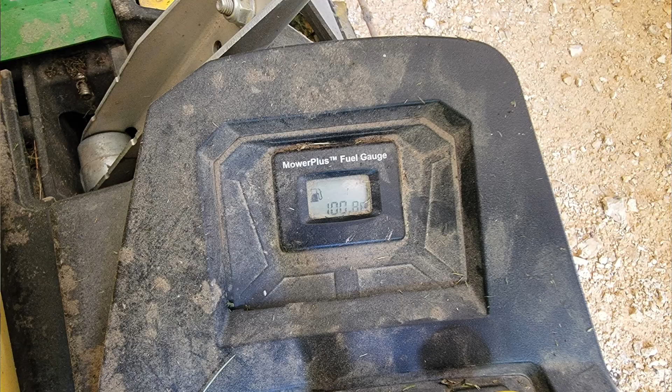Hey everyone, so we are doing a 100-hour inspection today. Basically changing oil, spark plugs, a bunch more stuff. There's a list I'll show you here in a second.

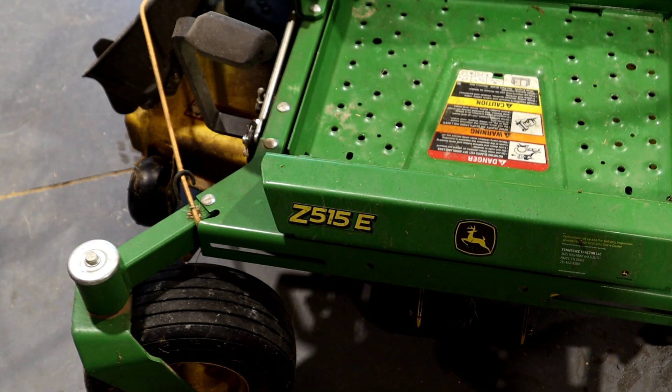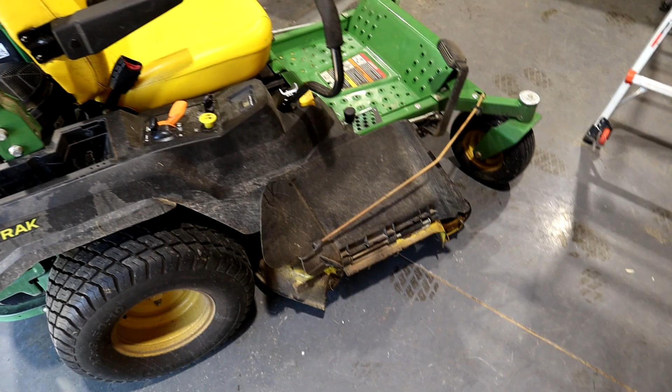This is a John Deere Z515E Echo. This is just a residential mower. Does a great job. I bought it about a year and a half ago. Finally put 100 hours on it, so we're gonna get some work done today. Just want to show you guys, walk around it a little bit so you can see what's going on here.

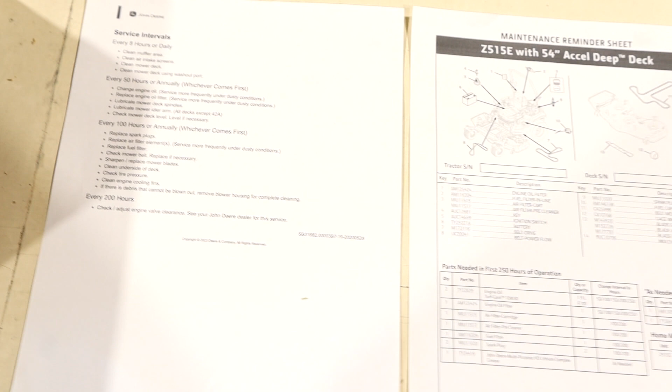I went ahead and ordered a maintenance kit off of Amazon. I'll put a link in the description. The one for this specific mower—there's different home maintenance kits. This one's an LG268. Okay, so let's go ahead and look at this stuff. I'm gonna set it here for a second and let you go through it.

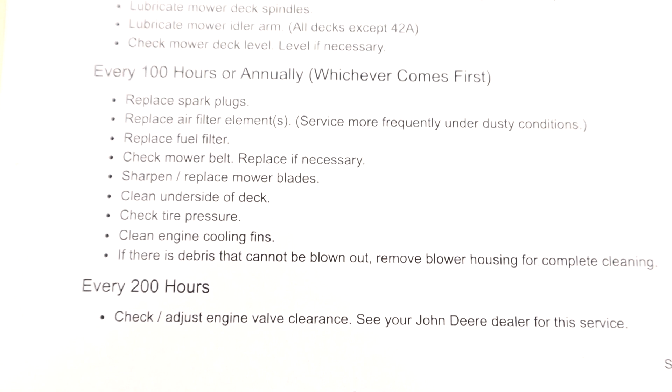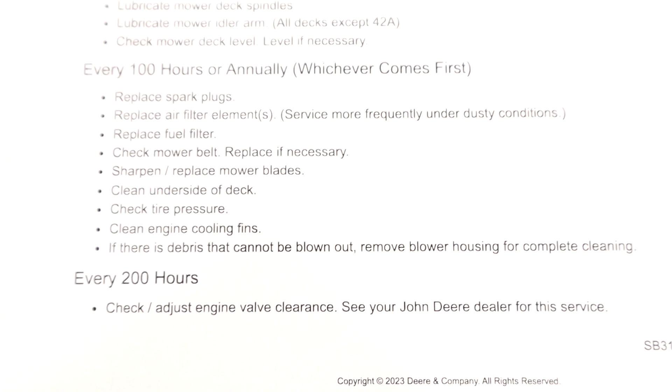At 100 hours, we're gonna replace the spark plugs, the air filter, fuel filter, check the mower belt, sharpen the blades—we're not gonna replace them, but we're gonna check them. Clean underside of deck, check tire pressure, clean engine cooling fins, and check for any debris. All this stuff is easy, I'll show you how to do it.

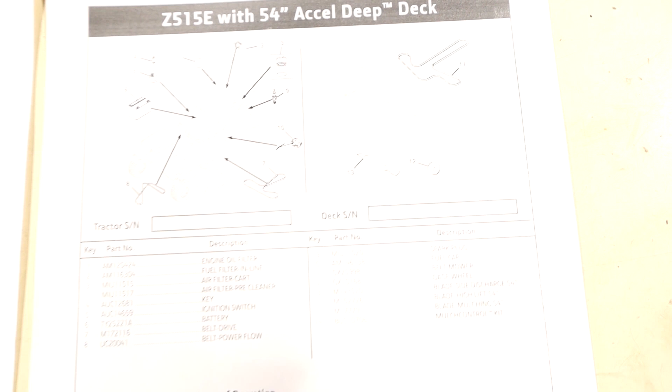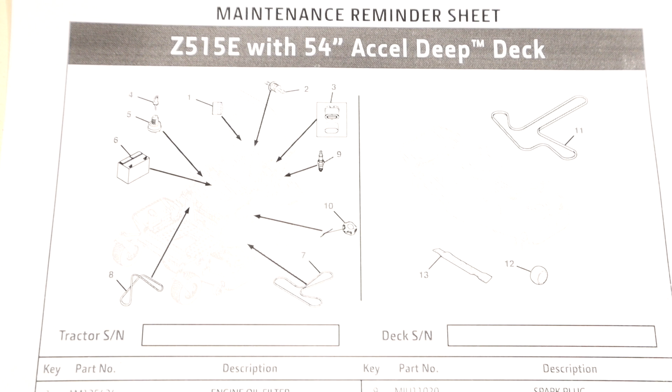Also, here's a little maintenance reminder sheet. Both of these are printed off directly from johndeere.com—you just gotta look it up, it's right there. You can also check your manual if you have one; it's not exactly the same as this, but pretty similar. This one's pretty cool because you just find your deck size and mower model, and it has everything you need. It tells you all the part numbers, including the part number for the home maintenance kit, which is LG268.

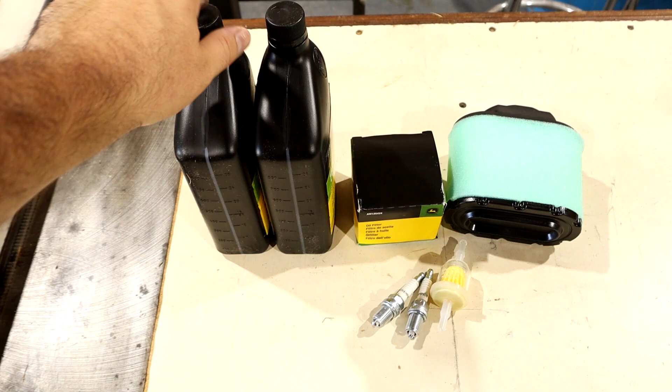LG268. Open up the home maintenance kit, and here's everything that's in here. We got 2 spark plugs, a fuel filter, air filter, oil filter, and 2 quarts of oil.

We're gonna go ahead and change the oil now. It's easy, all you need is a drain pan and minimal tools. Let me show you.

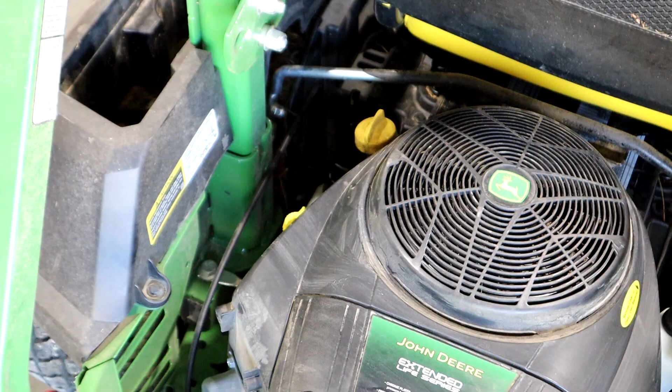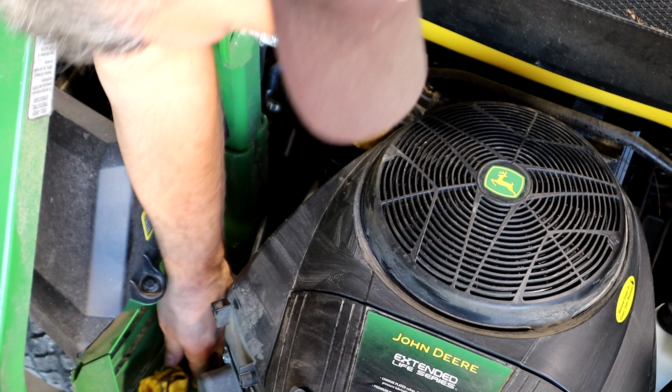Over here on the left side of the engine is a little guy right here, it's got a yellow cap on it—that's where you drain your oil at. So what we'll do is pull this down, then you just twist it off and pull it like that. One twist and a pull, and then you set it down in here, and it'll start draining your oil.

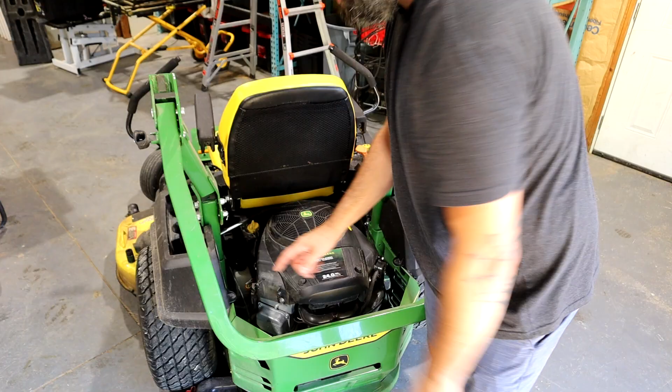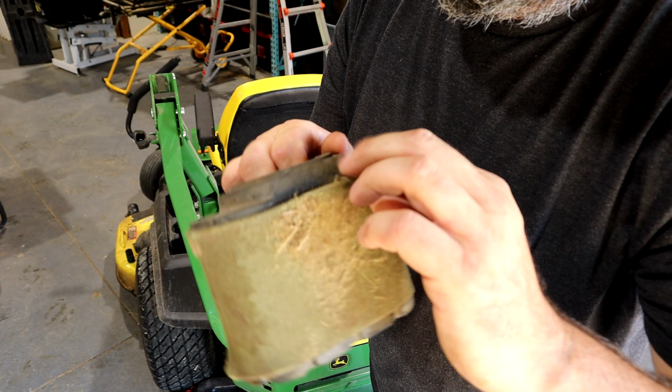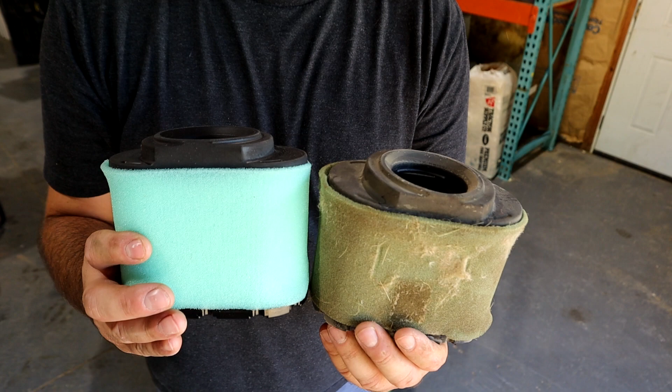While that's draining, I'm not gonna sit here and do nothing, I'm gonna do everything else. So we're gonna take the air filter off—you got these 2 little caps here on the end. Pull off, grab the old filter out, and this is what a dirty filter is gonna look like. This is pretty old, this is 100 hours—I cleaned it at 50 hours, but now we're changing it. Same filter, side by side, and it just pops right in here.

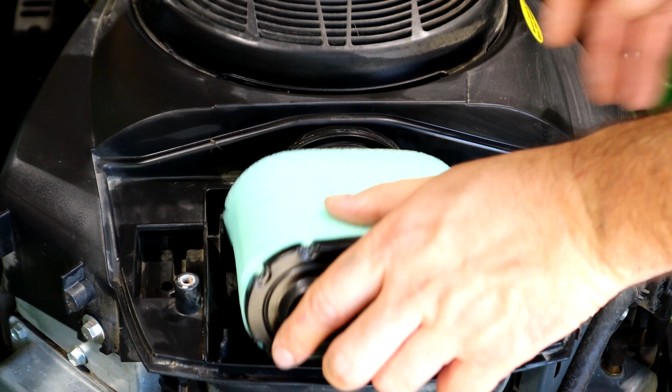Before we do that though, we're gonna clean up in here a little bit, just to be more thorough about this. It just pops right in here like that—that's it, it's that easy. Go ahead and put this cover back on; like I said, there's just 2 little wing nuts here, wing nut type things.

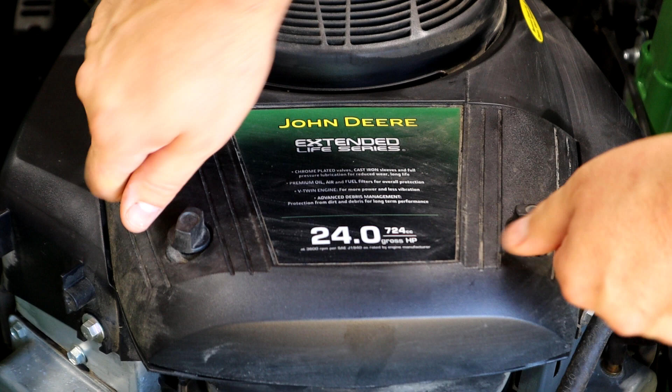We're gonna go ahead and lift the seat up, move this bar. I'm gonna come in from this side, and all you need is a pair of pliers—you just back off these clamps like this, and then pull it out. It might be on there a little tight because the clamps have been on for a while, but you just gotta pull pretty hard. And make sure you lift this up if there's any gas in here so it doesn't come out.

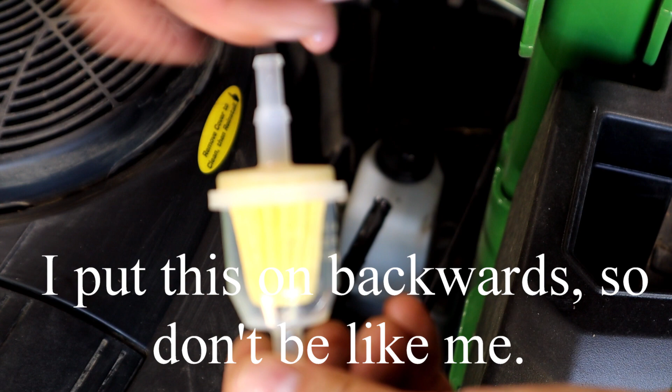Here's your fuel filter, that's what it looks like right there. How we're gonna put this on: gas is gonna come in through here, get filtered, and come out the other side. So you want this side facing the engine and this side facing the gas tank—engine side, gas tank side. Then go ahead and reinstall those clamps back.

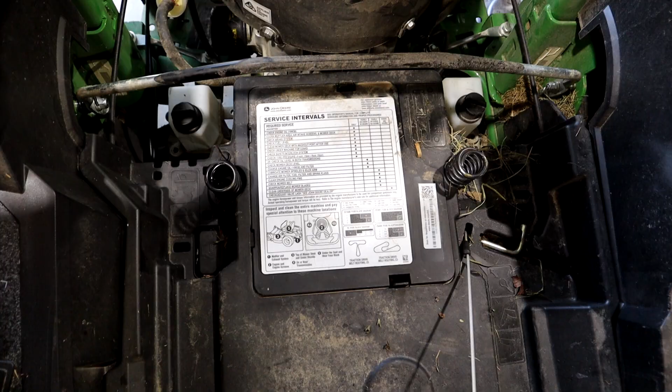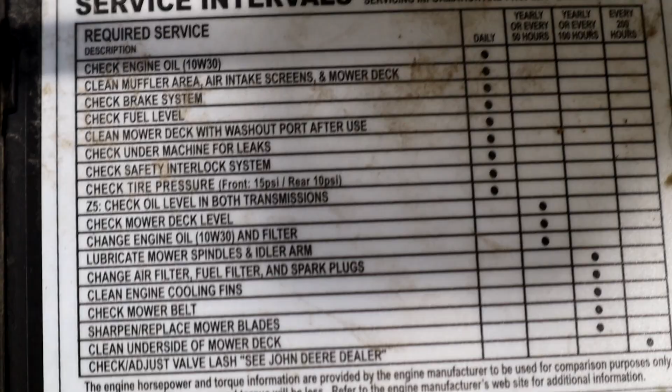Here's something to note as well—under the seat on this specific machine, you have your maintenance intervals or service intervals. It basically tells you, like every so many hours, daily, yearly, 50 hours, 100 hours, 200 hours, what you need to do. So it's kind of nice to have this on here.

Next we're gonna do the spark plugs. You're gonna have a spark plug wire over here and a spark plug wire over here, and that's where your spark plugs are. The socket you're gonna need is a deep well socket—you're gonna want a 5/8 inch socket.

I'll let you grab the old spark plugs and the new spark plugs and compare them, make sure they're the same size, the same gap, all that good stuff. And they are.

Then go ahead and put that cap back on and you're done. And then repeat the process for the next one.

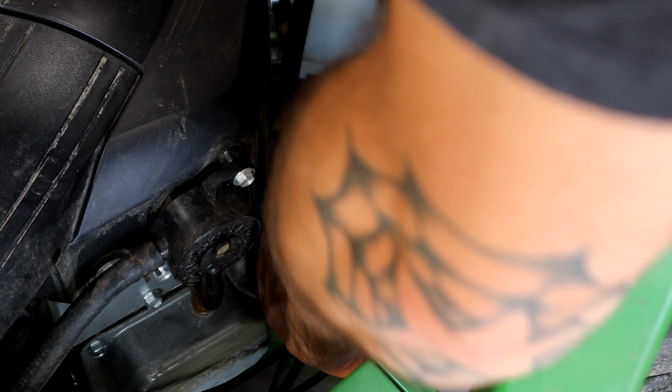Oil is done draining, so we're going to go ahead and move this over here, the drain pan, and then we're going to disconnect the oil filter. It's going to be a little bit messy, so just keep that in mind.

Just do it fast. It's going to come up, it's going to drain everywhere. And there's your oil filter. We're going to go ahead and just put this down here in the pan.

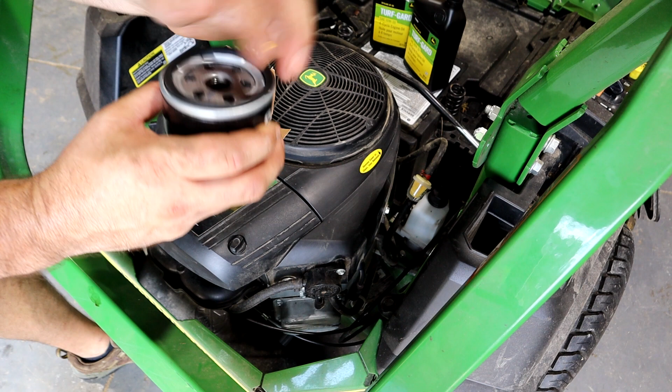Going to take the oil filter out, look at it, make sure there's no debris on the O-ring. And then grab some fresh oil.

Poke a hole or put my finger in there and lube up this O-ring a little bit. Basically just get a fresh bead of oil on here, and that's just going to help it seat a little bit better. And hand tighten it down. Want it pretty tight, but you don't want to put a wrench on here or anything like that. It's unnecessary to do that.

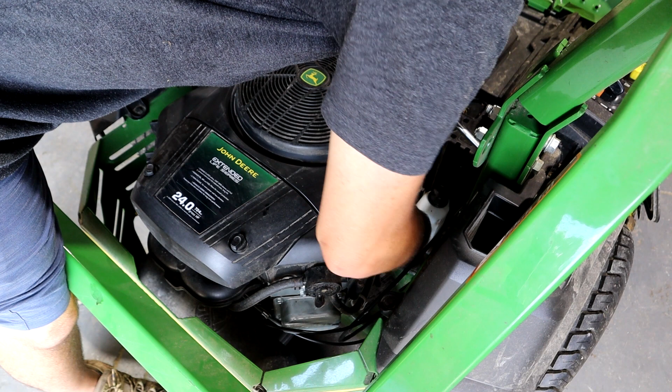And that's good enough. We're going to come back over here and put the cap back on this drain line. And then seat it back in its position, which is right here. And just pull it up and it stays there.

And now we'll go ahead and remove this. And we'll do it again, but this time we're going to definitely make sure nothing goes in there. Alright, now we're going to put some oil in here. So grab a funnel and just, we're going to put all 2 quarts in here.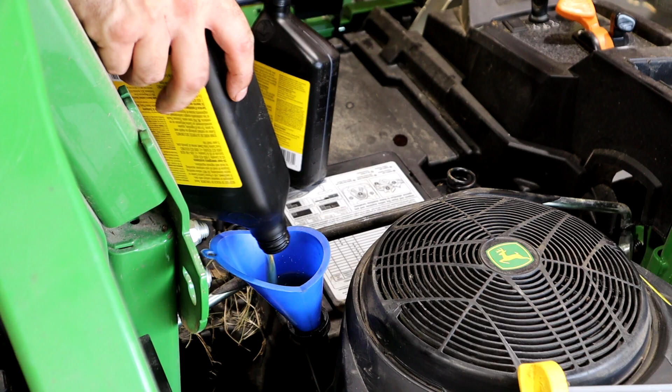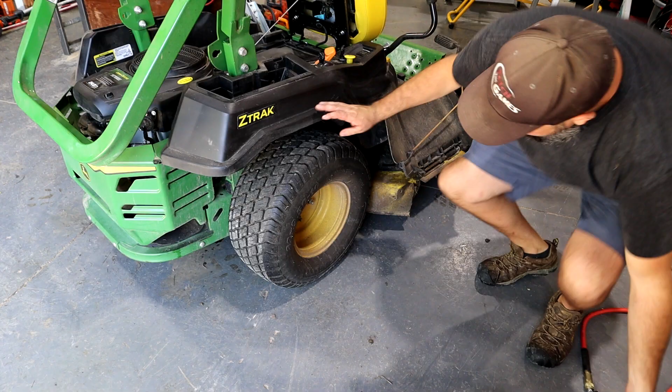Next, we're going to check the tire pressure. Now it's 10 in the back and 15 in the front for this model, and generally that information is going to be on this little plate right here under the seat. If not, you can just look it up. And then there's also a max tire pressure. You don't want to put it to the max though.

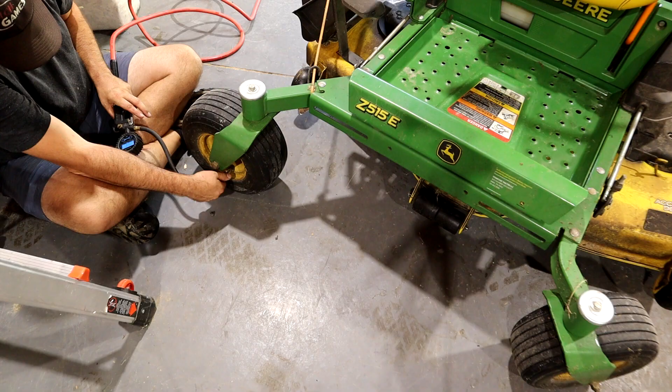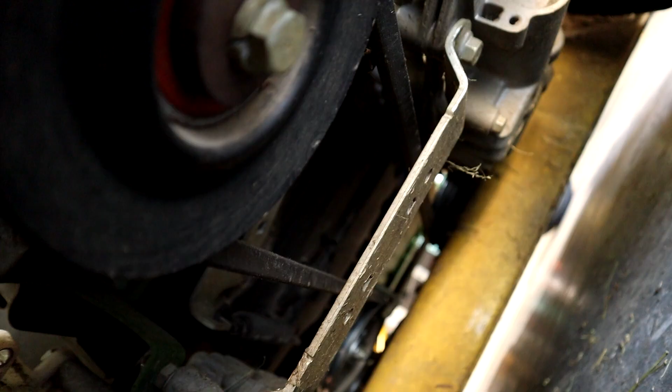All right, now we're underneath this mower, and we're gonna just check the belt and make sure it looks good. I've already kind of looked it over and it looks fine. I like to just look at this, and you can replace it if it's frayed or anything like that, or if it looks like it's having any issues. I haven't had any issues with this at all, so I call that good.

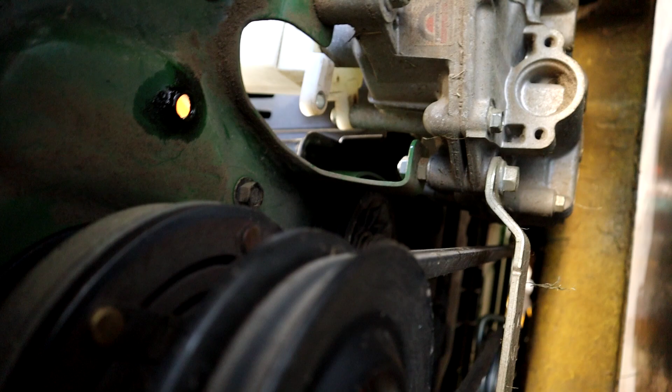We're underneath the mower deck, and I'm kind of just giving it a quick little inspection. It's hard to see under here with no light, but what it wants you to do under here is to clean out the underside of the deck, which we're going to do.

And then it has you sharpen the blades. Now I got 2 new blades on here, and the other one I sharpened, so I'm not gonna redo it again. I check that stuff on the regular. That's not a 100-hour inspection for me.

That's like a weekly type thing. And then also it tells you to level out the deck. I'm not gonna do that here because I haven't had any issues with deck leveling. Now if you want to level your deck, you just got to do it like right here, and over here. You just loosen these up. It's pretty easy to do. You can figure that out on your own if you need to do it.

But you want to make sure the underside of this deck is clean. You'll have grass get stuck on here. Just get yourself a putty knife. If you have a pressure washer, that works too. But you can see me, I'm pulling this stuff off.

It's falling down. That is going to bog down your mower if you don't get that on the regular, or if you constantly mow in wet conditions. It's just going to keep sticking on there, and it's going to cause this mower to not operate as it should.

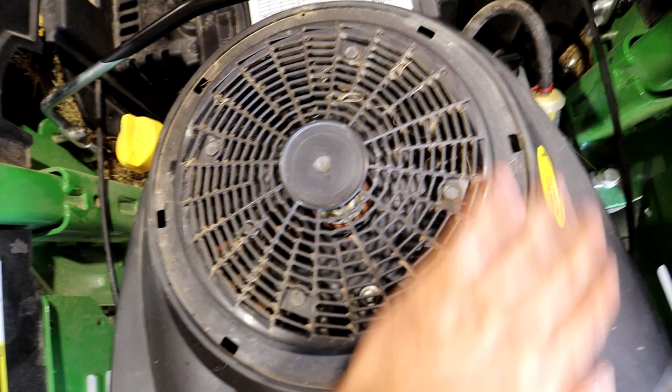The last thing it wants you to do is check your engine cooling fins, and they're going to be in here. This is your fan, so this is what sucks in all that grass, and this is your grass guard, your leaf guard. So you can take off these 4 bolts, and then down in there you can see.

I can see through here, so I'm not going to do anything here. There's a little bit of grass here, nothing ridiculous. What you're looking for down here on these fins is if there's any kind of buildup of mud or anything like that, and if there is, you want to take this off and clean those out.

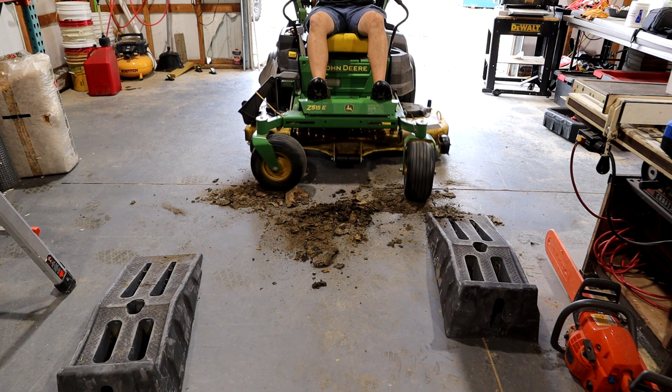So as you can see, this is all the old grass and the mud and stuff I pulled off of here. Now, having this on here is going to definitely decrease the efficiency of your mower, so make sure you do this on the regular.

Alright, so what I'm going to do next is, I'm not going to do it on camera, but I'm going to grab the pressure washer. I'm going to pressure wash this whole thing down. I like to do that every few months as well, just to make sure I keep it clean. And then I'm not going to mow because it's still kind of wet out. It's the morning time, and there's still dew all over the grass, and I really don't feel like mowing in that.